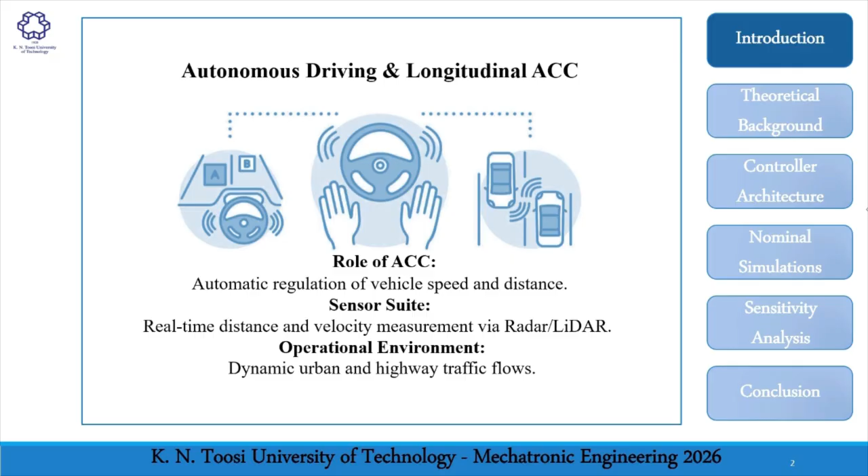To begin with the context, autonomous vehicles and advanced driver assistance systems rely heavily on adaptive cruise control for longitudinal navigation. Unlike conventional cruise control that only keeps a fixed speed, ACC uses forward-looking sensors such as radar or LiDAR to measure distance and relative velocity to the lead vehicle in real time, automatically regulating vehicle speed in dynamic traffic.

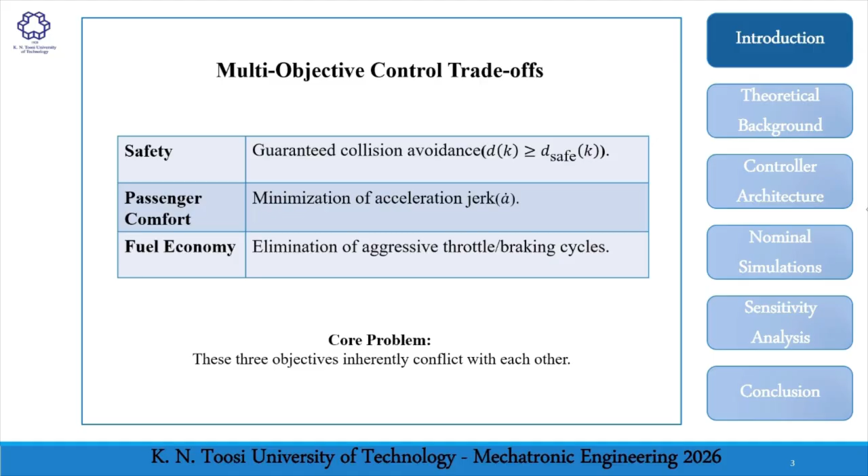Designing an effective ACC system is challenging because it involves three conflicting goals. First, safety, ensuring absolute collision avoidance by maintaining a safe following distance. Second, passenger comfort, which means minimizing jerk and sudden changes in acceleration. And third, fuel economy, which requires eliminating aggressive throttle and braking cycles. Balancing these competing objectives is the core problem we address.

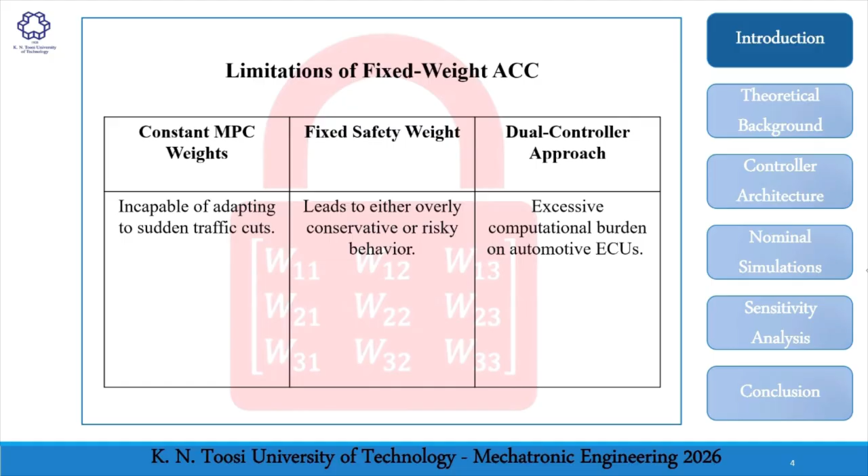Traditional model predictive control approaches typically use constant weighting parameters in their cost function. Because these weights are fixed, the controller cannot dynamically adapt to sudden traffic cuts or emergency braking. This leads to either overly aggressive or overly sluggish behavior. Furthermore, some literature proposes dual controllers, one for tracking and one for energy management, which introduces significant computational overhead on vehicle ECUs. To overcome these limitations, we implemented the unified

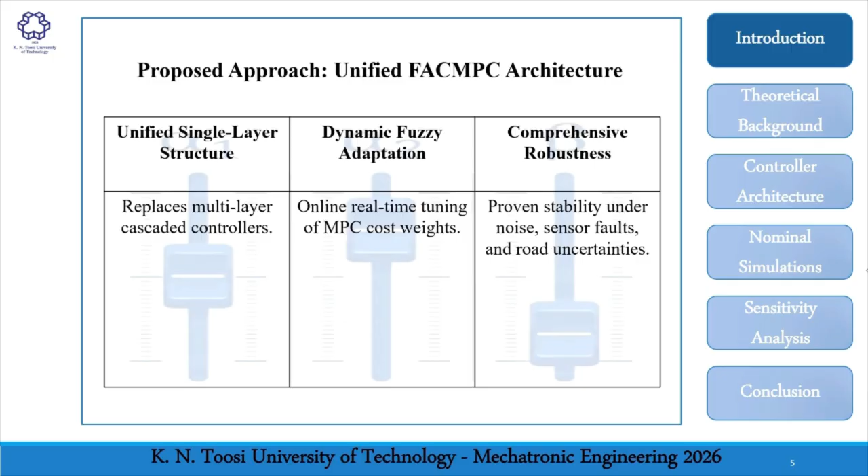FACMPC architecture. This approach combines model predictive control with fuzzy logic in a single unified layer. The fuzzy engine evaluates driving states in real time and dynamically tunes the MPC cost weights. This single controller achieves optimal multi-objective balance and robust performance under disturbance.

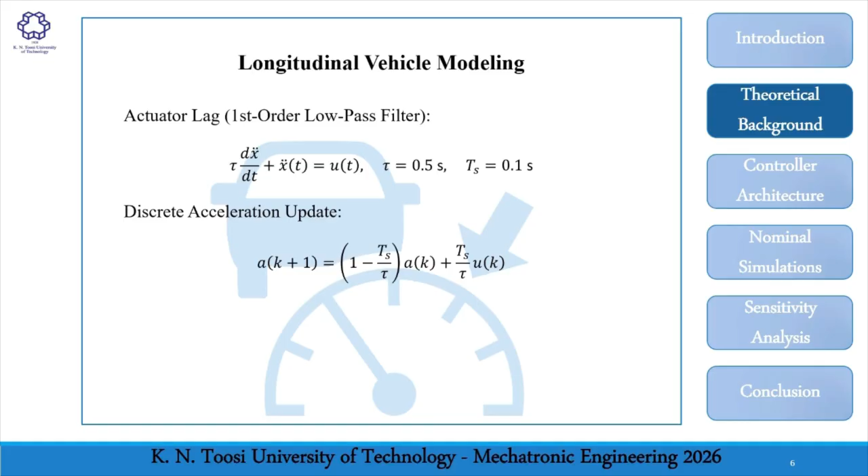Moving to the mathematical modeling, the lower-level vehicle dynamics and actuator lag are modeled as a first-order low-pass filter with a time constant of 0.5 seconds. Discretizing this model with a sample time of 0.1 seconds gives us the discrete acceleration update rule shown here. This accurately captures actuator delays and ensures that control commands remain physically realistic.

The dynamic safe following distance is defined based on a fixed standstill gap of 10 meters, plus a speed-dependent headway with a time gap of 1.5 seconds. Our state vector consists of two primary error states: delta D, the spacing error, and delta V, the relative velocity between the lead and ego vehicle. The discrete state space formulation maps these errors directly into the controller.

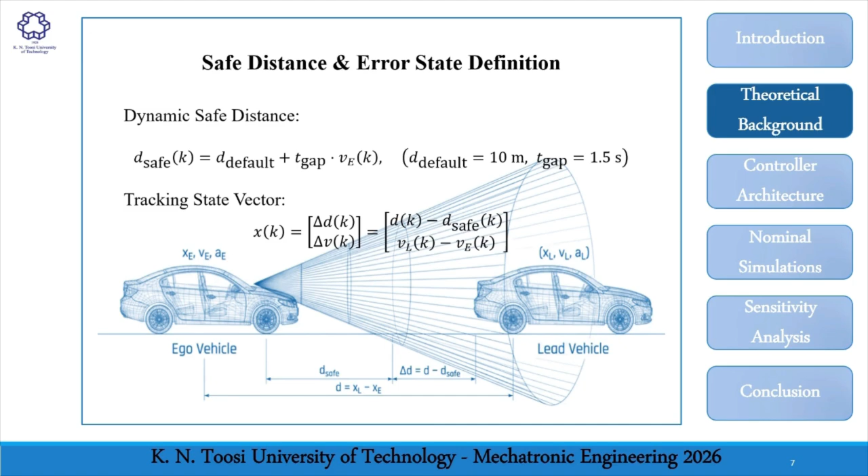At each time step, the MPC solves an online constrained optimization problem over a prediction horizon. The cost function penalizes spacing error with weight alpha 1, velocity error with alpha 2, and control effort with weight beta. We enforce hard physical constraints on non-negative spacing error to prevent collisions, as well as strict bounds on velocity, acceleration, and actuator inputs.

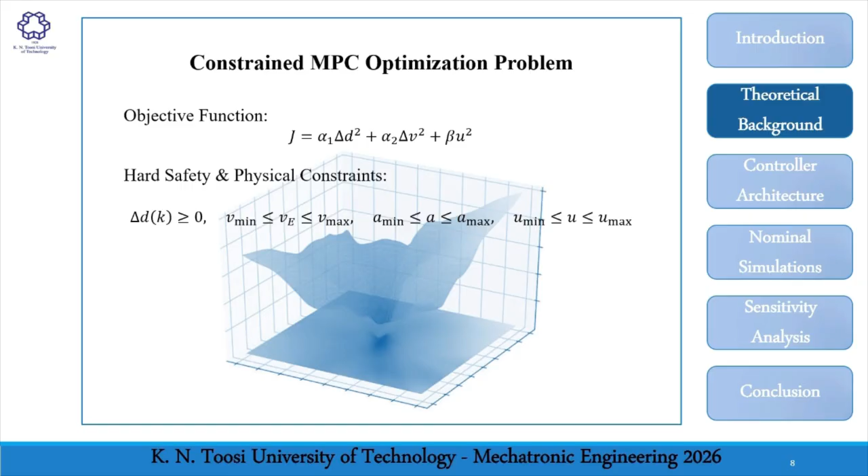Instead of one complex MIMO fuzzy block, the system employs three separate multi-input single-output Mamdani fuzzy systems. FLS1 generates alpha 1 for distance safety, FLS2 generates alpha 2 for velocity tracking, and FLS3 computes beta for control effort and comfort. Each system takes the same three real-time inputs: spacing error, relative velocity, and ego acceleration.

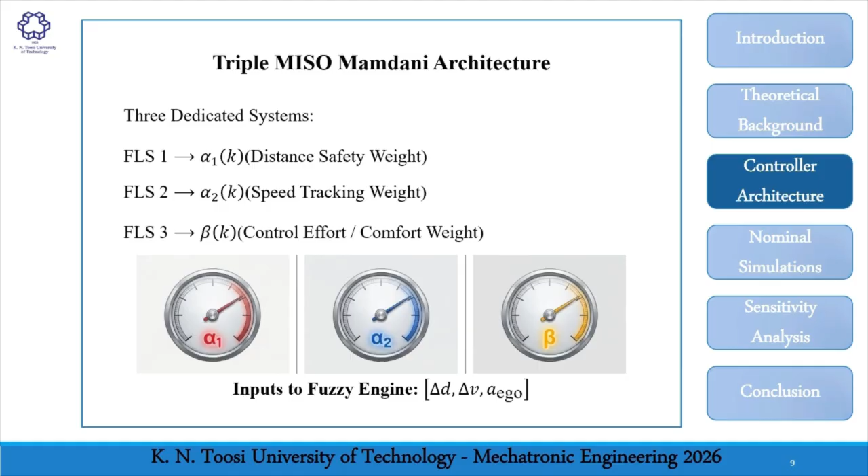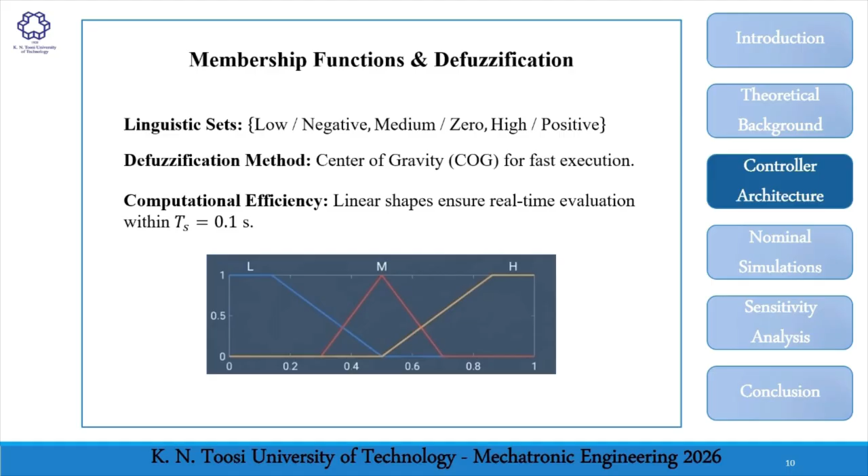To ensure fast real-time execution within our 0.1 second sampling period, triangular and trapezoidal membership functions are used. Linguistic terms are divided into low negative, medium 0, and high positive. We apply the center of gravity defuzzification method, which provides smooth deterministic weight outputs with very low computational burden.

The rule base consists of 27 fuzzy rules designed around 3 key operating modes. In safety priority mode, when spacing error is low, alpha 1 is driven high, making collision avoidance the top priority. In speed tracking mode, when the gap is safe, alpha 2 becomes high to match the lead vehicle smoothly. And in eco and comfort mode, during steady state cruising, beta is increased to eliminate actuator chattering and save fuel.

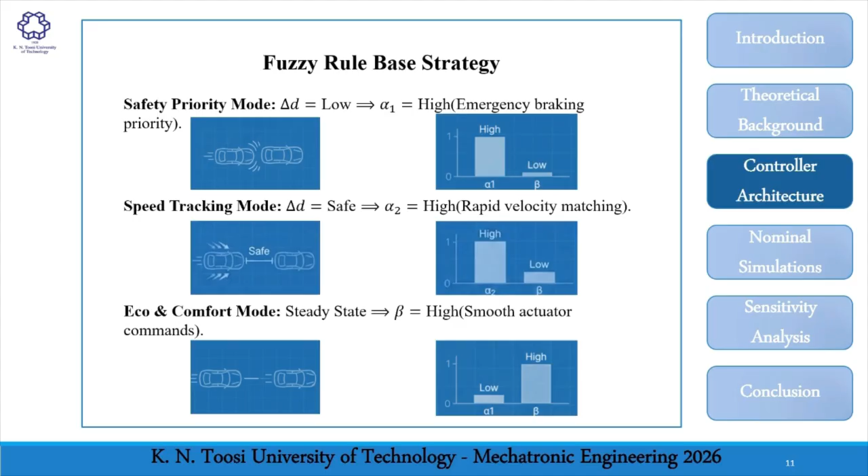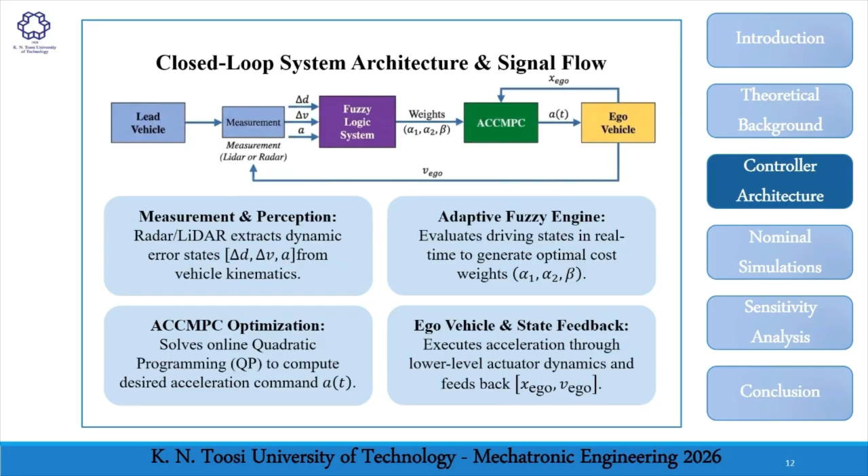Here we see the overall closed-loop architecture in Simulink. Radar or LiDAR measures the lead vehicle motion and extracts the dynamics error. The fuzzy logic system continuously updates the weighting parameters alpha 1, alpha 2, and beta. These weights feed into the MPC solver, which generates the optimal acceleration command executed by the ego vehicle dynamics.

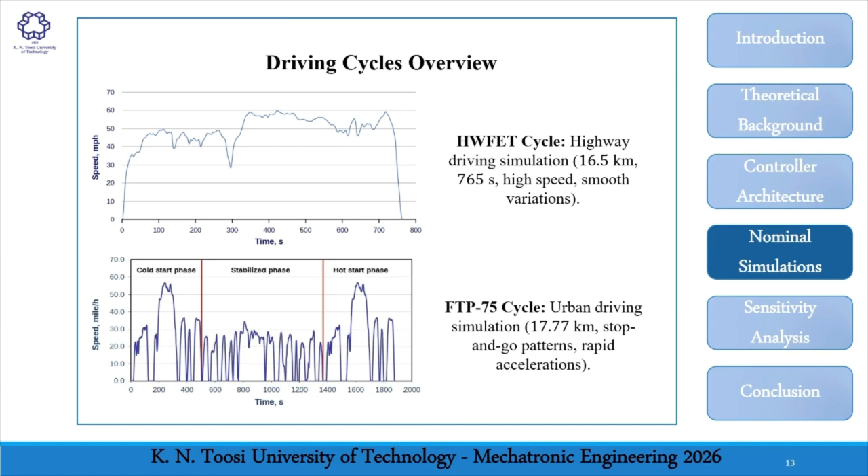We evaluated the system across 2 standard driving cycles. First, the HWFET cycle, representing highway driving over 16.5 km for 765 seconds with high speeds and gentle transitions. Second, the FTP75 cycle, representing urban driving over 17.77 km for 1,874 seconds with frequent stop-and-go patterns and rapid speed variations.

Starting with the HWFET highway results, the ego vehicle starts with an initial distance of 200 meters. FACMPC smoothly closes the gap and converges to the safe distance line without any dangerous undershoot. Notice how velocity tracking matches the lead vehicle accurately, avoiding the large initial speed overshoot that occurs in the fixed weight baseline.

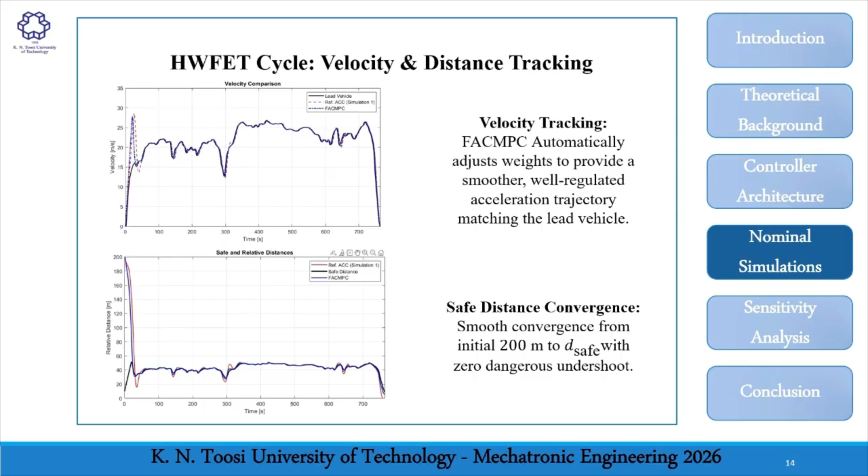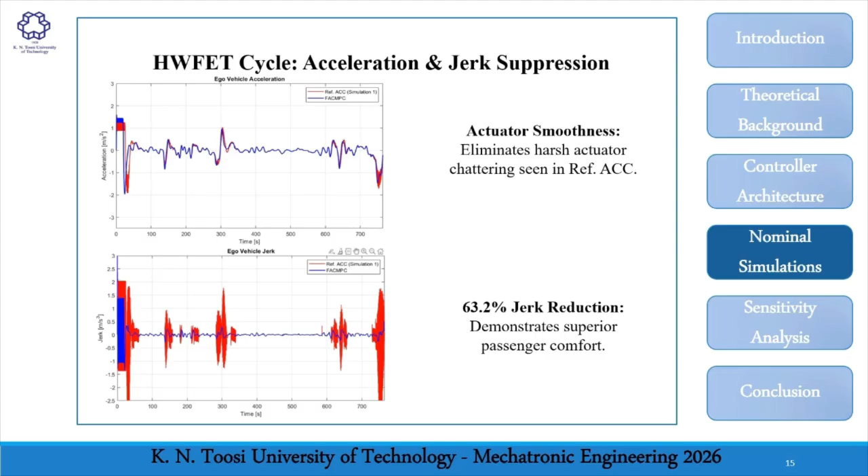Looking at acceleration and jerk profiles in the highway cycle, the fixed weight controller suffers from high-frequency actuator chattering, especially during initial transient and braking phases. In contrast, FACMPC provides a clean, continuous acceleration profile, achieving a remarkable 63.2% reduction in average jerk, significantly enhancing passenger comfort.

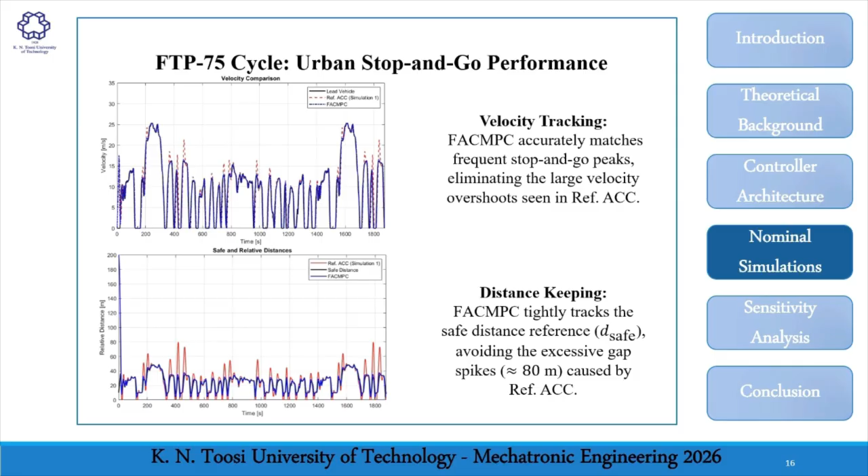In the urban FTP75 cycle, the challenges are much higher due to repeated stop-and-go maneuvers. FACMPC tightly tracks the safe distance reference throughout all traffic stops. The baseline ACC creates excessive gap spikes of up to 80 meters, which wastes road capacity, whereas our fuzzy adaptive controller maintains tight, safe following.

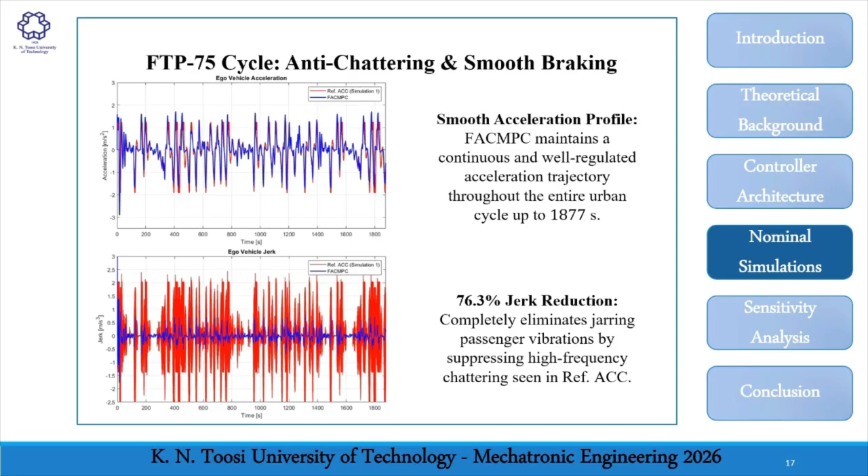Examining the acceleration and jerk in the urban cycle, the benefits of fuzzy weight adaptation become even more pronounced. While the fixed weight system shows severe chattering and heavy vibration bands, FACMPC eliminates these oscillations entirely, achieving a 76.3% reduction in average jerk across the entire

1,877 seconds. To summarize our nominal simulation results quantitatively, on the highway cycle, FACMPC achieved a 63.2% reduction in jerk and a 13.2% improvement in distance tracking RMSE. On the urban cycle, it delivered a 76.3% jerk reduction, a 26.4% improvement in distance RMSE, and a 16.6% lower average acceleration, directly translating to lower energy consumption.

Minor visual differences in raw plot spikes compared to the paper arise from undisclosed proprietary solver settings, but the quantitative trends fully match.

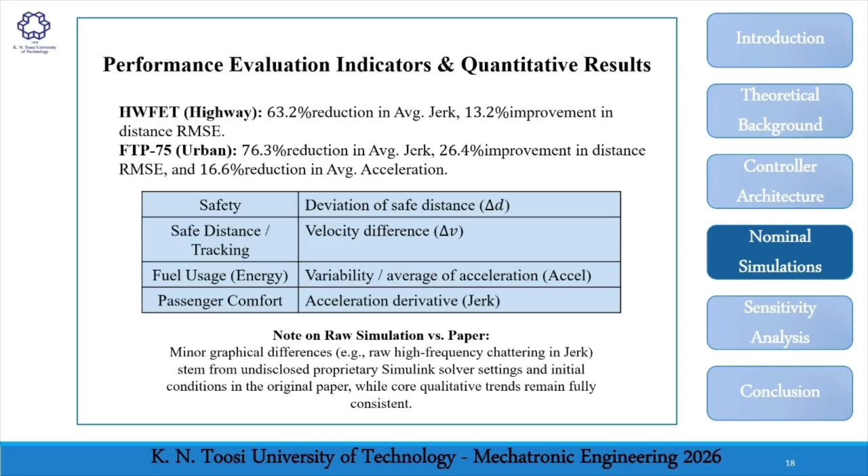To validate the practical reliability of FACMPC, we tested 3 challenging disturbance scenarios. Scenario Alpha, high-frequency band-limited radar sensor noise. Scenario Beta, complete temporary sensor communication blackout for 10 seconds. And Scenario Gamma, parametric uncertainties evaluated via 100 stochastic Monte Carlo runs.

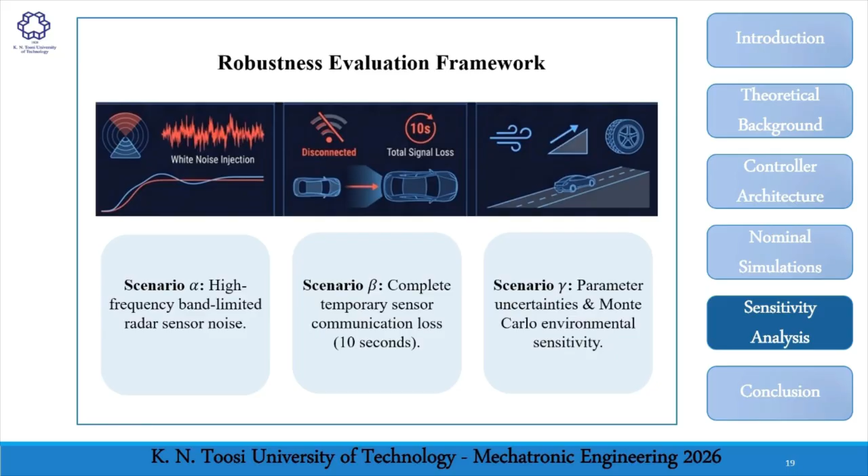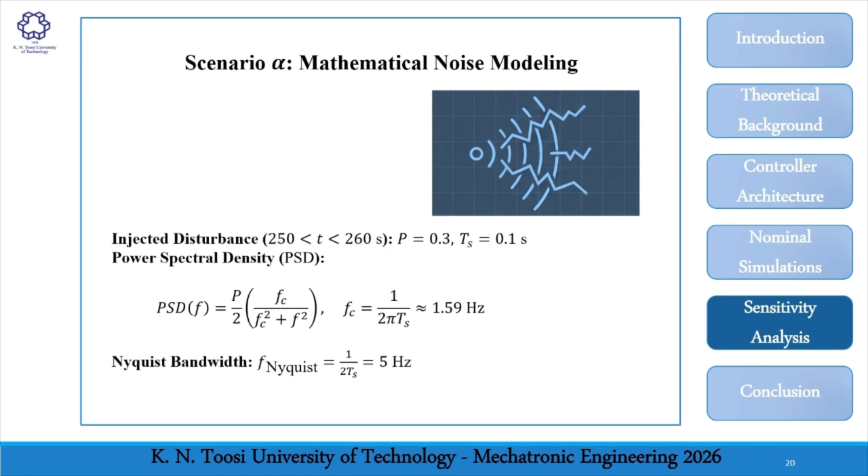In Scenario Alpha, band-limited white noise with a noise power of 0.3 is injected into the lead velocity signal between t equal 250 and 260 seconds. The noise is modeled using the power spectral density equation shown on this slide, with a cutoff frequency around 1.59 Hz and a Nyquist frequency of 5 Hz, simulating real-world sensor inaccuracies.

Here are the simulation results under scenario alpha for both driving cycles. Despite the lead velocity telemetry experiencing extreme high-frequency fluctuations between 15 and 28 meters per second, the ego vehicle velocity remains completely smooth. The fuzzy engine instantly increases the control effort weight beta, actively filtering high-frequency noise from reaching the throttle and brakes while keeping distance deviation below 1.5 meters.

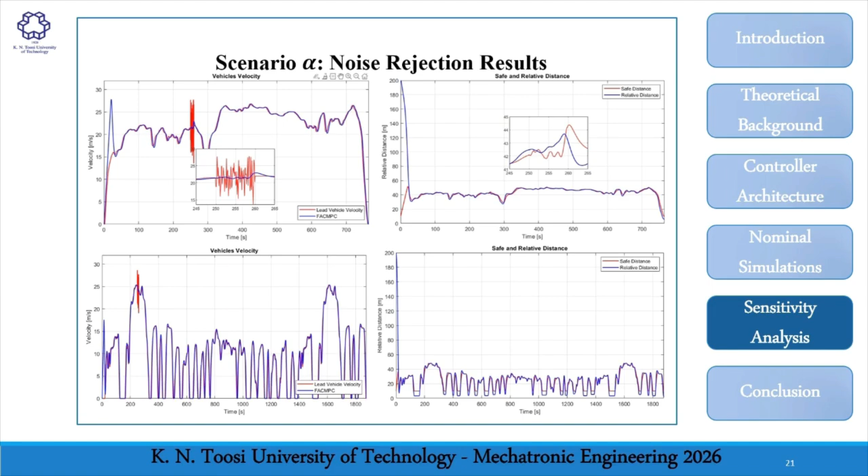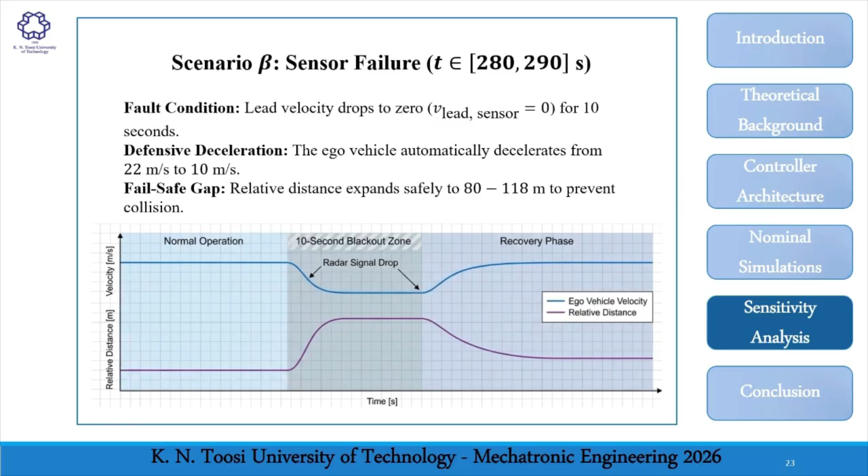Scenario beta tests fail-safe behavior. Between 280 and 290 seconds, the lead vehicle velocity signal drops to zero, simulating sensor blackout. As seen in the diagram, the controller immediately engaged defensive deceleration, reducing speed safely from 22 to 10 meters per second, expanding the safety gap up to 118 meters to guarantee collision avoidance.

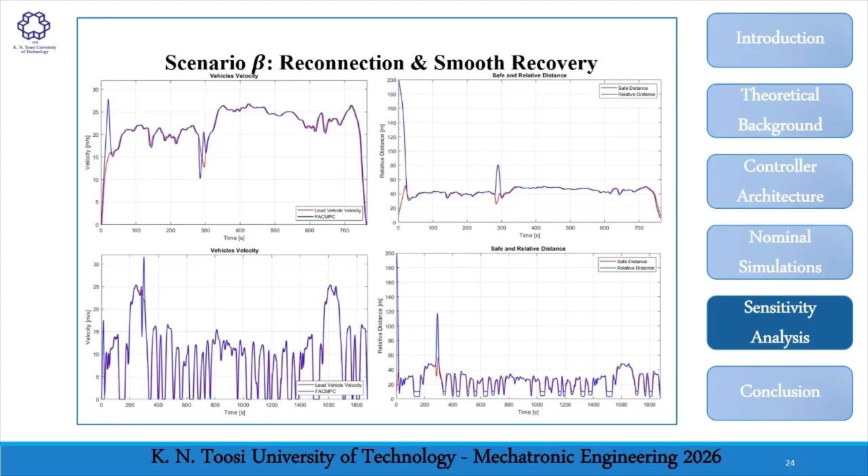Once communication is restored at t equal to 290 seconds, the fuzzy engine detects the enlarged gap and dynamically boosts the velocity tracking weight alpha 2. As shown across both HWFET and FTP75 cycles, the ego vehicle accelerates smoothly and reconverges to nominal cruising speed and safe distance in less than 20 seconds, completely without overshoot or instability.

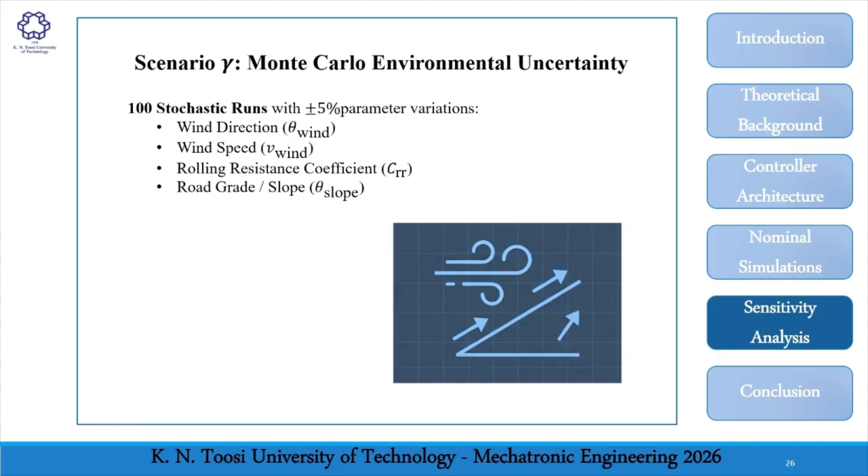In scenario gamma, we evaluated environmental sensitivity using 100 stochastic Monte Carlo simulation runs. We introduced random plus or minus 5% variation across 4 key parameters: wind direction, wind speed, rolling resistance coefficient, and road slope. This assesses how fuel economy holds up under unpredictable driving conditions.

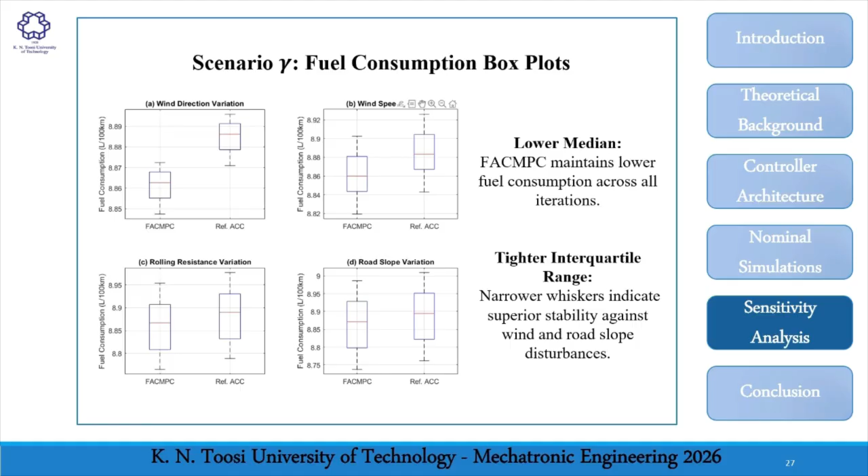The resulting box plots clearly show the economic advantage of FACMPC across all 4 parameters. For wind direction, wind speed, rolling resistance, and road grade, FACMPC consistently maintains a lower median fuel consumption and significantly narrower interquartile range compared to the baseline ACC. The tighter whiskers prove that the fuzzy adaptive weighting prevents unnecessary throttle compensation.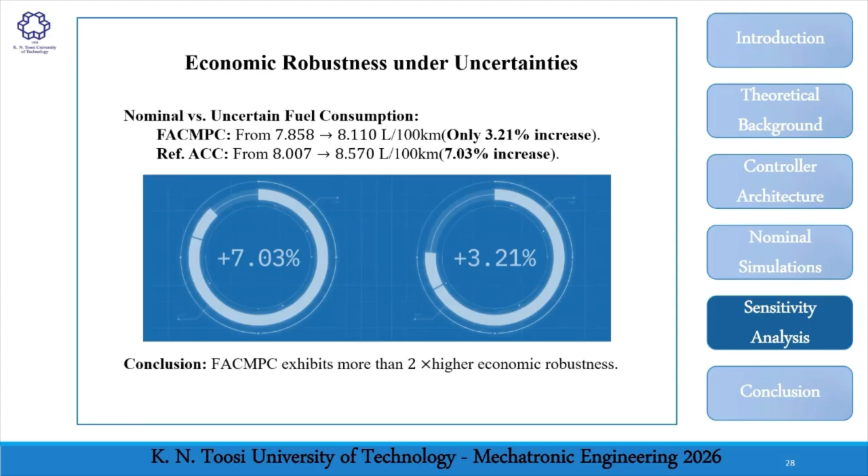Quantifying the overall economic robustness under environmental uncertainty, FACMPC fuel consumption increased from 7.858 to 8.110 liters per 100 kilometers, which is only a 3.21% increase. In contrast, the conventional ACC saw fuel consumption rise by 7.03%. This confirms that FACMPC provides more than twice the economic robustness against real-world disturbances.

To summarize the core achievements of this work: first, we successfully unified multi-objective tracking into a single-layer fuzzy MPC framework. Second, we achieved superior passenger comfort with up to 85.5% jerk reduction while strictly guaranteeing safety. And third, we verified comprehensive fault tolerance against noise, sensor dropouts, and environmental uncertainties.

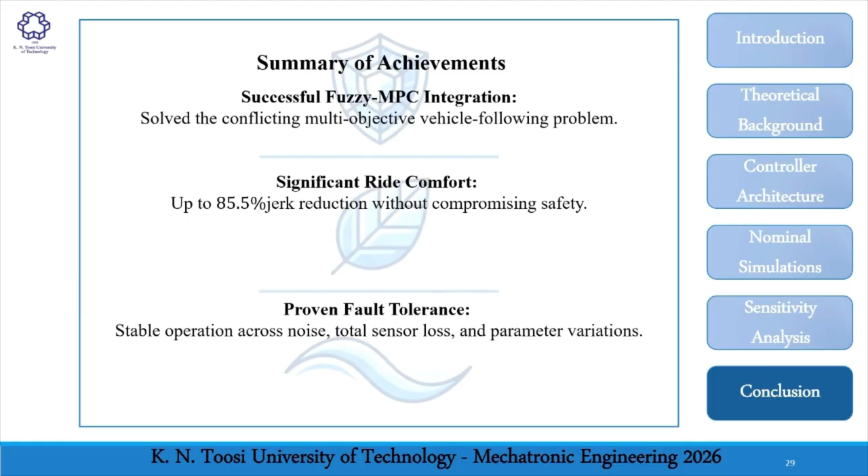Before real-world deployment, several practical challenges must be considered. Solving quadratic programming online requires efficient embedded solvers for automotive ECUs. We also need to account for hardware limitations such as sensor calibration drift, actuator wear, and edge case tuning in severe weather conditions, like heavy rain or snow.

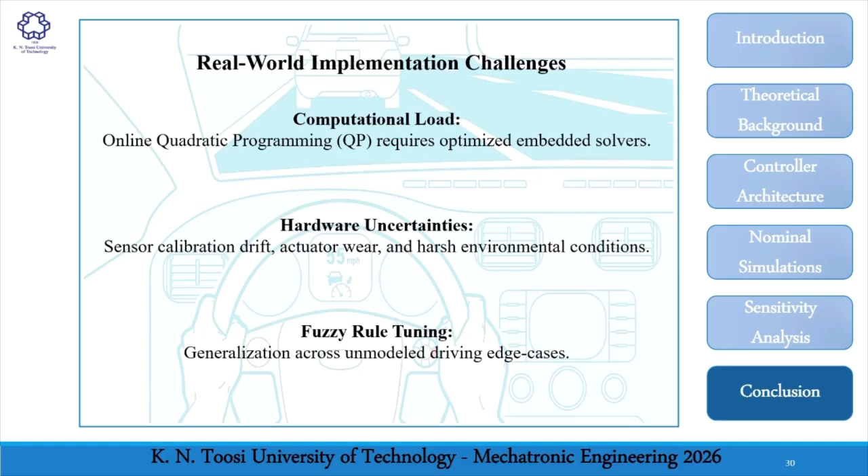As promising future research directions: first, integrating human-in-the-loop control, where the driver's cognitive load is monitored via facial analysis and eye tracking to adaptively adjust safety weights. Second, deploying code on microcontrollers for hardware-in-the-loop testing. Third, extending FACMPC to 2D combined longitudinal and lateral steering control. And finally, studying string stability in connected autonomous vehicle platoons with V2V network delays.

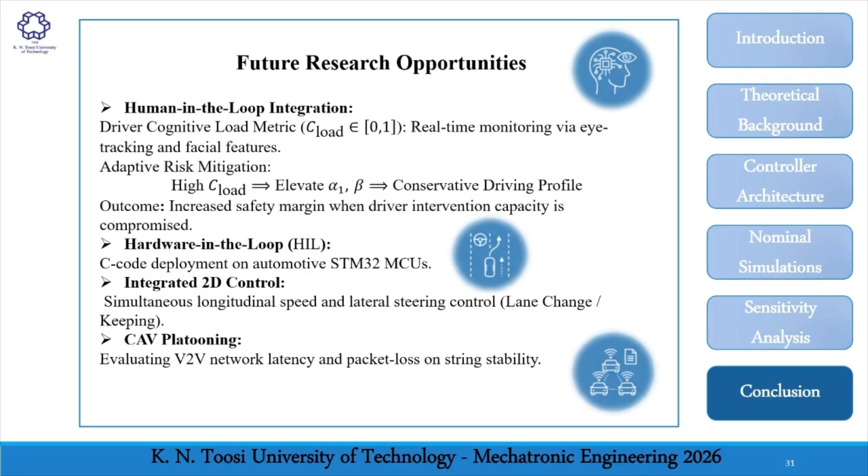This concludes the presentation of our fuzzy adaptive cruise control with MPC project, validated against state-of-the-art literature published in engineering applications of artificial intelligence.